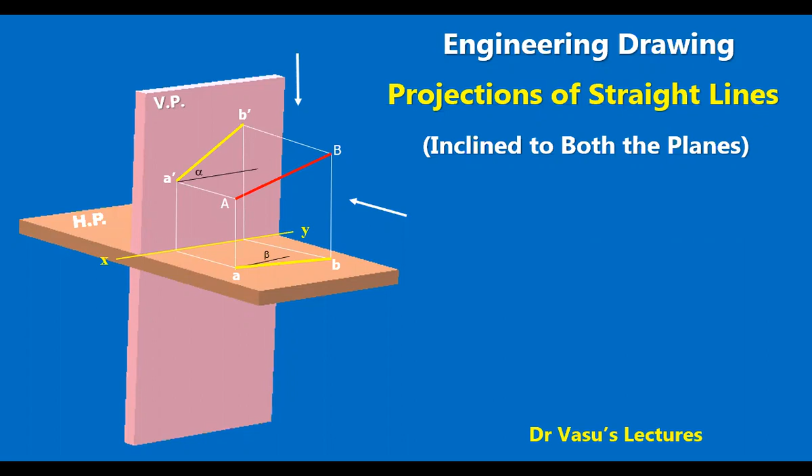Now let's jump into the topic. Here we'll see the line inclined to both the planes. A straight line making angle with both the reference planes looks like this - making angle with both HP and VP. In the front view or top view, we cannot see the true length of the line because it is not parallel to any of the reference planes.

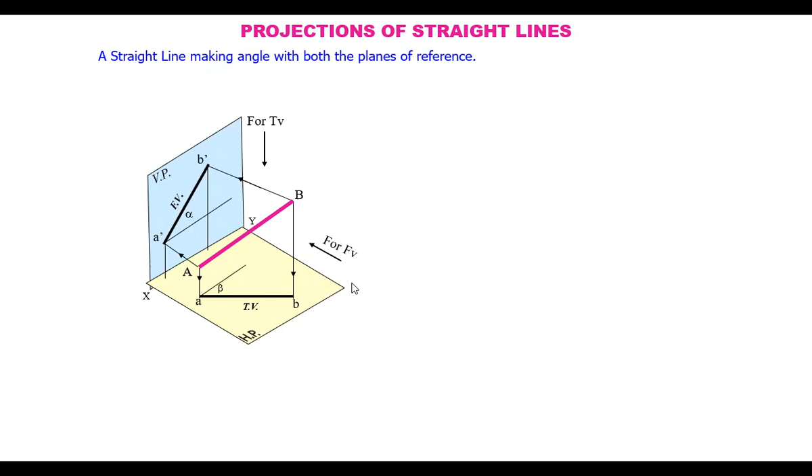If you see the actual front view, it appears shorter than its original length, making some angle with HP. And in the top view, it appears something less than its true length. So if you draw the projections of the line, the final projections appear like this. Let's see how to draw it.

Let's take the problem here. A straight line AB, 100 mm long, has one of its ends position given, and it's making some angle with the HP and VP. The true length and true inclinations of the line are given, and we have to find the final projections - A dash, B dash, and AB - and also the apparent angles. Let us see how it is.

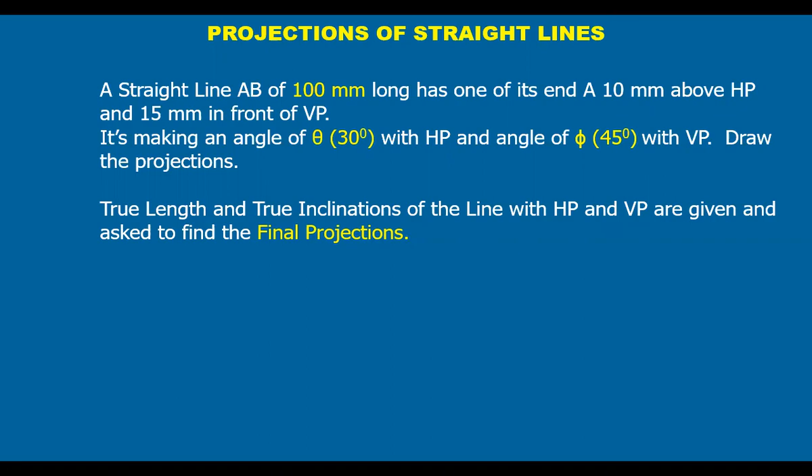So this is the data given. Let's represent the data. Take the reference line. A is 10 mm above HP. At 10 mm above HP, we have drawn a line and marked a point here. This is A dash.

And 15 mm in front of VP, at 15 mm distance, we have drawn another line and marked the point here. A and A dash will be lying on the same projector, the perpendicular line to the reference line. So this is about point A.

Now let's see the angle with the HP. It is making some angle, say theta, with the HP. To get the final projections of the line, we consider the line in two initial positions, and slowly we come to the final projection.

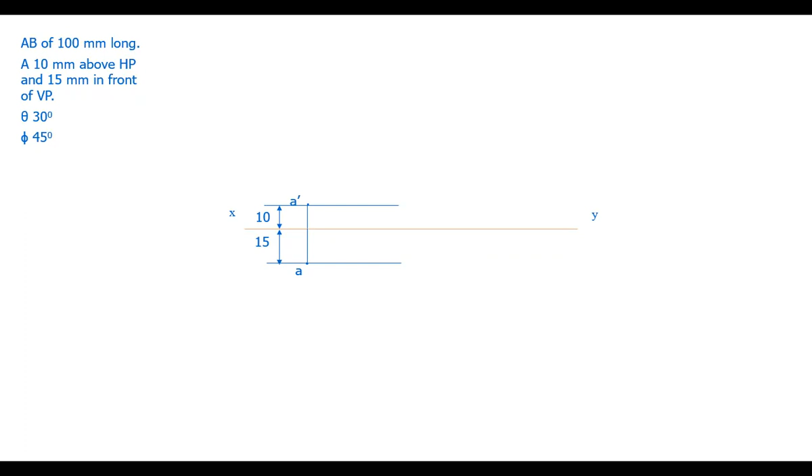First, the initial position we consider is parallel to the vertical plane. When it is parallel to the vertical plane, in the front view we see the true length of the line, that is 100 mm, and the actual inclination with the horizontal plane, theta - say 30 degrees here.

So we get A dash, B1 dash - we call it the first initial position because this is not the final position. The line is making angle with both planes, but here we consider it parallel to VP and making angle only with HP. That's why this is not the final position; we call it the first initial position.

Of course A is fixed, but B is not - that's why we call it B1 dash. So this is the true length of the line, 100 mm, and the actual inclination 30 degrees is this one.

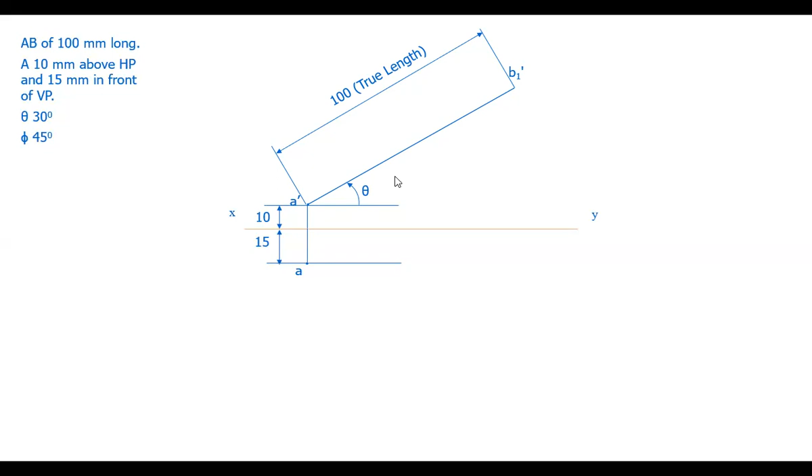Now let's draw the top view of this. When it is making an angle of 30 degrees with the HP, the point B will be at a certain height above the horizontal plane. This height is fixed - when you increase the angle, point B moves to a higher position; when you decrease the angle, point B comes down.

When you maintain this angle constant at 30 degrees with the HP, point B will be at the same fixed distance - point B may be anywhere on this line. That's why we call this the locus of B, B1, in the front view.

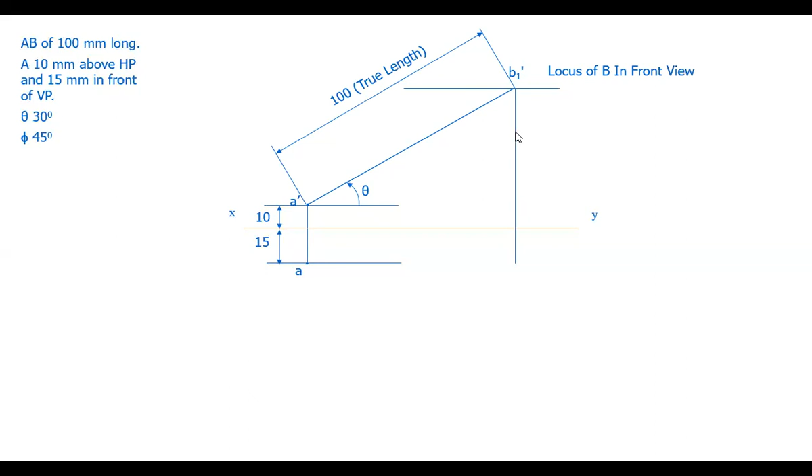Next, let's draw the top view for this. B1 dash and B1 will be lying on the same projector, and because it is parallel to the vertical plane, 15 mm in front of VP, passing through A - AB1 is the top view, and A dash B1 dash is the front view.

So this is the first initial position, and we make two observations here. When it is making an angle 30 degrees with the HP, we get some length in the top view that is less than its true length, and this AB1 is fixed - there won't be any change until there is a change in the angle with HP.

Second observation: when it is making an angle theta, 30 degrees, with the horizontal plane, the point B will be at this height only, and when it is at this height, the angle is fixed. So this line drawn at this height, passing through B1 dash above the reference line, we call it the locus of B in the front view. These are the two observations in the first initial position.

Now let's consider the line in the second initial position, that is the line parallel to the horizontal plane and making angle 45 degrees with the VP. When it is parallel to horizontal plane, we see the true length in the top view.

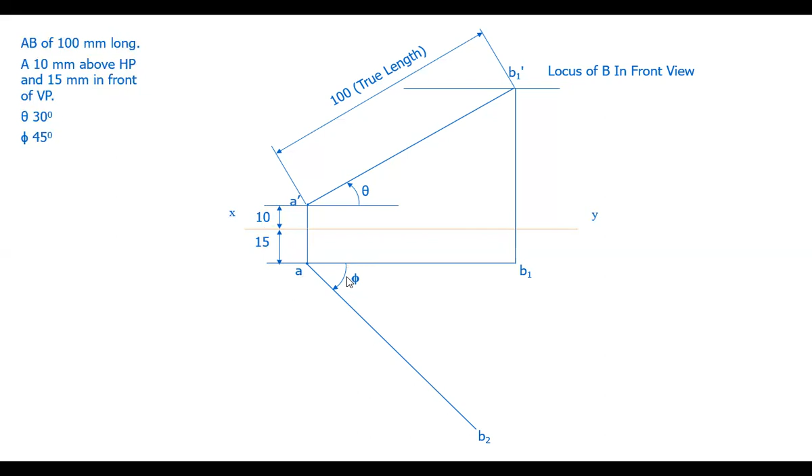So we consider this as the second initial position and call it AB2 - the top view of the line. Here we see the actual inclination 45 degrees with the vertical plane, and also the true length of the line in the top view, actual length 100 mm. When it is making an angle 45 degrees with the VP in the top view, the point B - we are calling it the second initial position.

That's why it is B2. The point B will be at a fixed distance in front of VP from the reference line. If you draw a line passing through B2, we call this the locus of B in the top view. So this is B2.

Now we draw the front view for this, draw projectors, and because it is parallel to the horizontal plane, passing through A dash, draw a line horizontally. This intersection point is B2 dash.

Here again, we make two observations. The line, when it is making angle with the vertical plane, some 45 degrees here, its true length is not seen in the front view. And the true length is fixed.

How far? Until and unless you change the angle with VP, there won't be any change in the front view. So when you are maintaining this 45 degrees, the front view length is fixed and it is A dash, B2 dash. In the top view, the point B will be at this distance in front of VP.

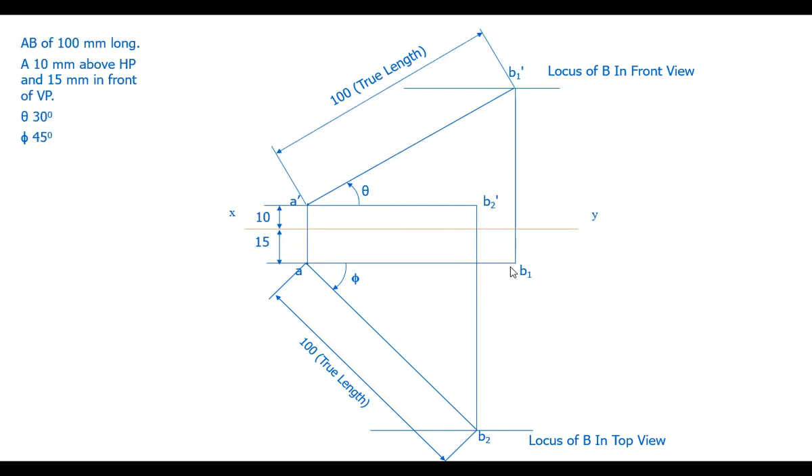AB1 is the length of this line and then it is seen from the top, and AB1 is the top view line. A as center, AB1 as radius. If you draw a line, an arc, how far?

Until it reaches the locus of B in the top view. Why up to this locus only? When the line is actually parallel to VP, it is making 0 degrees angle with VP. When you are moving this point B away from VP, it slowly makes more angle, 1 degree, 2 degrees like this. When point B is moving like this, it is making more angle with the vertical plane.

And we know that when this point B is at this locus, it is making this 45 degrees with the VP. So that's why we rotate this point B until it reaches the locus of B in the top view. When it reaches the locus, this is the final position of the point B. Final end position, point B.

Join AB by a straight line, and you can highlight it because it is the final projection of the line in the top view. Now, we can do one more thing.

We know the length of the line in the front view, A dash, B2 dash, and A dash as center, A dash B2 dash as radius. You can rotate the line like this, B2 dash moving upwards and starts making angle with the HP also. So A dash as center, A dash B2 dash as radius.

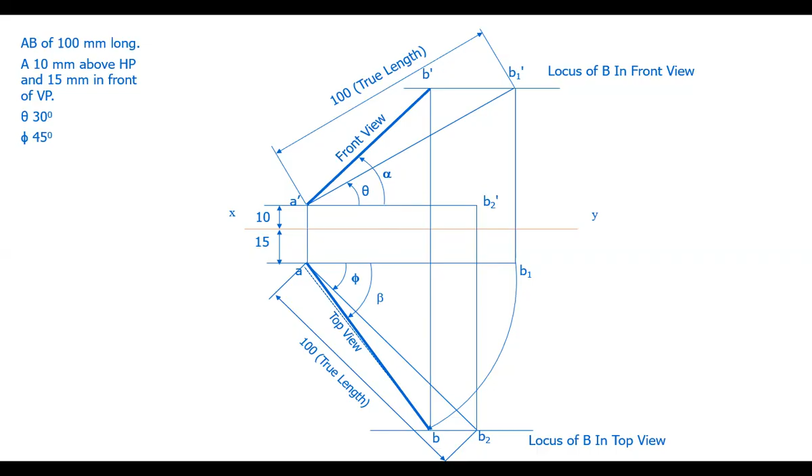So with this, we have finished drawing the final projections of the line and marking all the angles. In the next coming videos, we are going to see more problems on this line inclined to both the planes. Hope you had understood this topic very well.